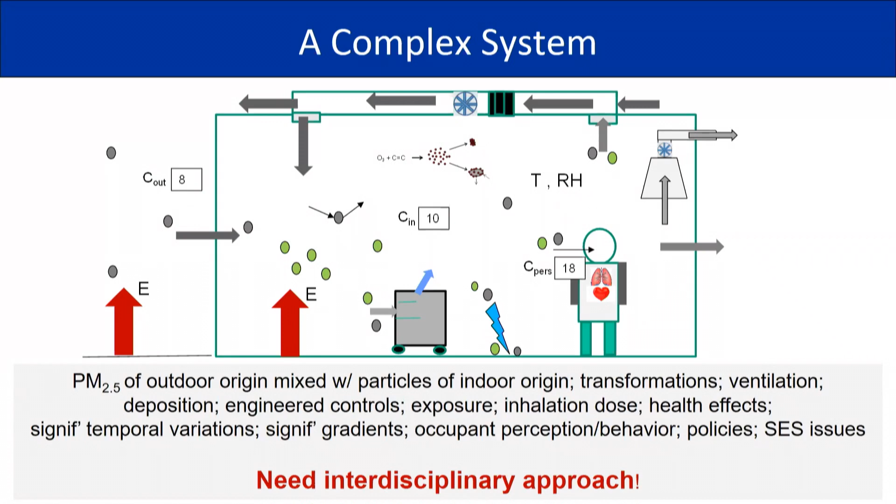This underscores the fact that we need an interdisciplinary approach to deal with these problems. And even though the system is complex, one of the nice things about this workshop is that there were some really practical nuggets that came out, and I'll try to highlight some of those.

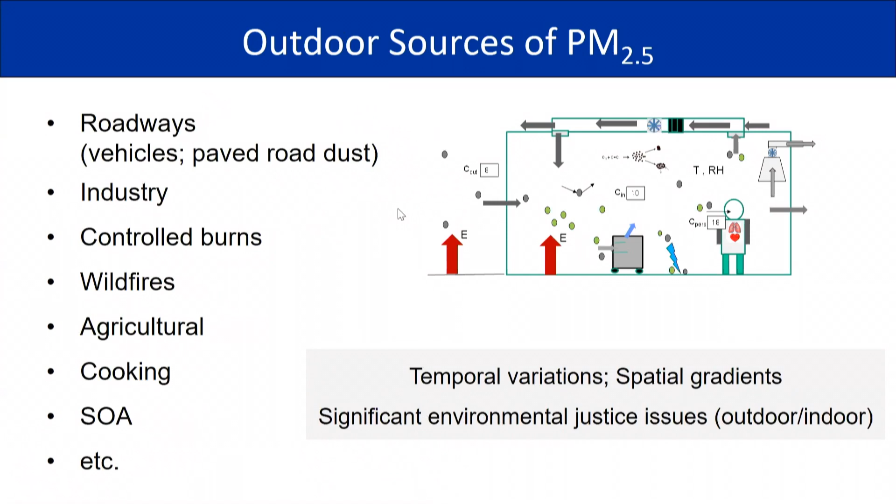We'll start with outdoor sources of PM 2.5. There are many. I don't need to go through all of these. But again, there's significant temporal variations and spatial gradients with respect to outdoor sources of PM 2.5 that affect indoor PM 2.5. And there are significant environmental justice issues associated with the locations of underserved communities with respect to many of these sources.

There's the outdoor to indoor transport of PM 2.5 across the building envelope. Brent Stephens spoke about the fact that the infiltration factor for PM 2.5 that's outdoors coming indoors has a central tendency about 0.5, although it varies a lot by specific homes and by city and by season, which means that concentrations of particles indoors that are of outdoor origin are about half of what they are outdoors. And there are a lot of major factors that affect that.

There was an interesting analysis done of microenvironmental PM 2.5 exposures that suggested that about 71% of our exposure to PM 2.5 occurs in our homes and about 20% inside other buildings. So by difference, you can see how much happens outdoors, less than 10%. And of our exposure inside these buildings, roughly half is to PM 2.5 of outdoor origin and half is to PM 2.5 of indoor origin. These are generalizations again, but good to keep in mind that our exposure indoors is to both outdoor and indoor PM 2.5.

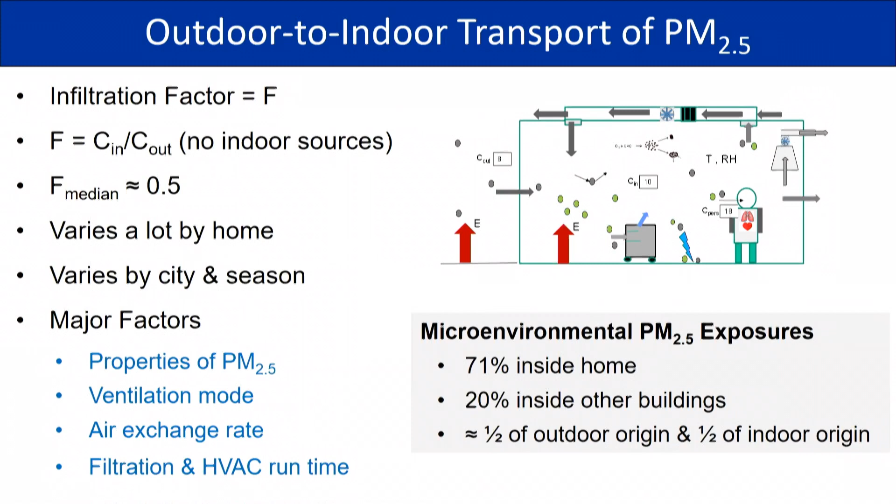There are indoor sources of PM 2.5, and I list a lot here by category: combustion, which involves cooking and candles and fuels; phase change, we heat up oils, they get driven into the air where they're cooler and they condense; mechanical, like ultrasonic humidifiers and vacuum cleaning; biological, respiratory aerosols and mold spores and that kind of thing. Chemical reactions can occur indoors with a wide range of products, including secondary organic aerosols.

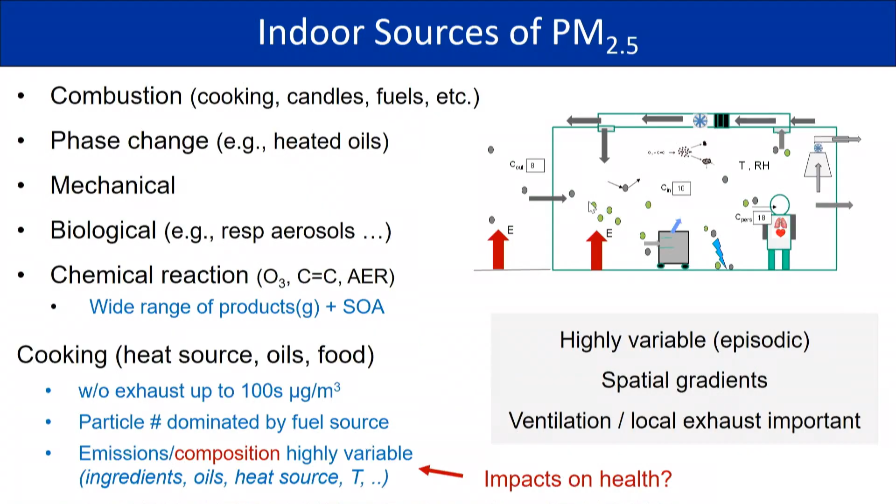And then we heard from Marina Vance in the first session about cooking and emissions from the heat source, from oils that are used for cooking, from the food itself. Without exhaust, we could be talking about hundreds of micrograms per cubic meter during cooking. Particle number is dominated by the fuel source, and emissions and composition are highly variable during cooking events, and there's very little information about what that means with respect to health.

All right, so transformations occur in indoor atmospheres. When outdoor PM2.5 comes indoors, they see a large surface to volume ratio that they didn't see outdoors, if you can put human qualities to particulate matter. They see less oxidants, a lot of VOCs and semi-volatile organic compounds indoors, much higher concentrations than outdoors.

Evaporation occurs, which can shrink particles. Thermal partitioning occurs, which changes the composition of particles. There's uptake of SVOCs like plasticizers indoors. And these transformations can be quite significant. They can affect size, pH, chemical composition, et cetera. And those transformations occur for particles of outdoor origin and indoor origin.

So one question is do these transformations of particles change the particle health effects? We actually don't have good data on that at the moment.

Effects of relative humidity on PM2.5. We know that relative humidity affects water content of PM2.5, which can change the size of particles, especially for particles like respiratory particles. It can also affect chemistry that happens in those particles and microbiology that happens in those particles.

We know that bacteria survival is lowest at low RH, and virus survival is lowest at mid RH. So differences in whether we're talking about bacteria or viruses. And so one question is, what are the optimum environmental conditions we should have indoors to reduce the health impacts of PM2.5?

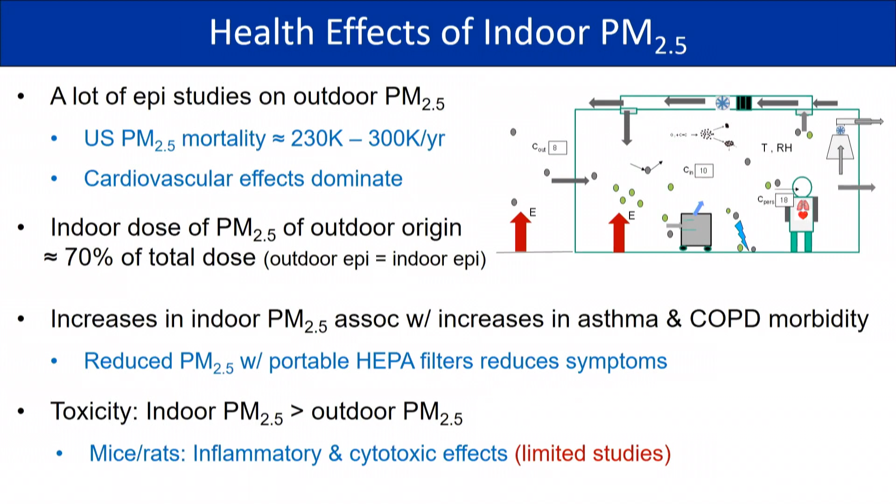Andrea Ferro in the first session mentioned that there are some limited studies with mice and rats that show that indoor PM2.5 has greater toxicity than outdoor PM2.5 with respect to inflammatory and cytotoxic effects, but also acknowledged that there's a very limited number of these studies and more research is needed.

There's a complexity of assessment of metrics for indoor PM2.5. It's better to measure indoor particles than outdoor particles and try to predict what happens with outdoor particles. Personal measurements are best if we can make them, but they're cumbersome. There are 4 dimensions to complexity associated with indoor PM2.5.

We have a broad size range, even within the PM2.5, from ultrafine all the way up to 2.5 microns. Chemically complex particles, high temporal variability in concentrations, and spatially variable. And I think Bill Nazaroff made the comment that no instrument measures everything.

So one question is, what measurements are the most important? And where should we make them? And when should we make them? Right? There's still optimization to be done there.

There's complexity of measuring actual exposure to PM2.5. Do we focus on short time scales like hours or longer time scales like months? Depends on whether we're looking at acute or chronic health effects. Time between exposure and onset of health impacts is important.

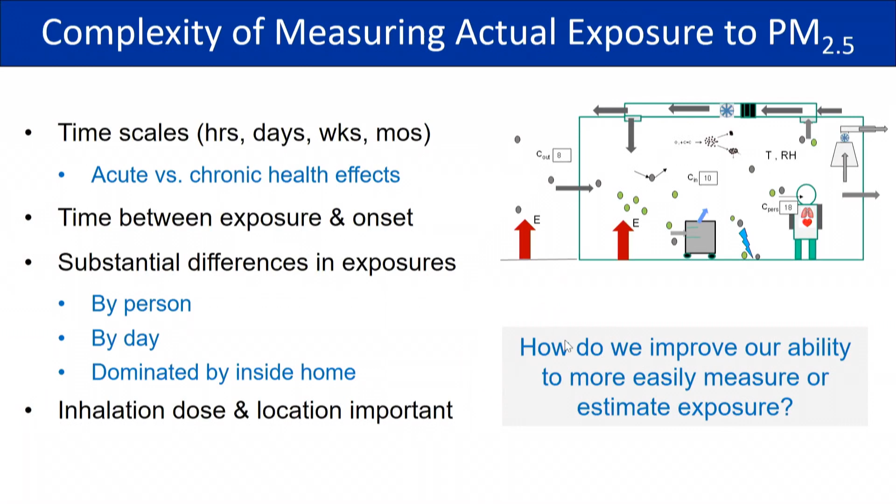And there are substantial differences that Kirsten Koehler showed in session 2 by person, and by day for the same person. But our exposures tend to be dominated inside our homes. Inhalation dose and location in the respiratory system are both important. How do we improve our ability to more easily measure or estimate exposure? Still work to be done there.

Low-cost consumer instruments for PM2.5. There's growing use of these instruments, these optical instruments, but protocols are lacking. There are a lot of different metrics that are used to compare them against reference instruments and look at limits of detection and that type of thing.

Under controlled laboratory conditions relative to reference instruments, these devices tend to be plus or minus a factor of 2, but worse than that in the field with a lot of confounding factors. There are problems with these devices when we get to concentrations less than 10 micrograms per cubic meter, which is actually a fairly common range for PM2.5 indoors.

They can be applicable to trends to see that things are going up rapidly or down rapidly to tell us something bad's happening or something better is happening if we put on a portable HEPA air cleaner, et cetera. And how do we best use these to improve indoor air quality during wildfire season and that type of thing? I combined here some of Lindsey Graham's comments with Dusan Licina's.

And I think moving forward with these low-cost sensors, we have to understand that individual perception of indoor air quality is important. And can sensors help with those perceptions? Lindsay presented information that suggested that anything that gives healthy action visuals is preferred by people. They don't want to just have a number that says 12 or 20, right?

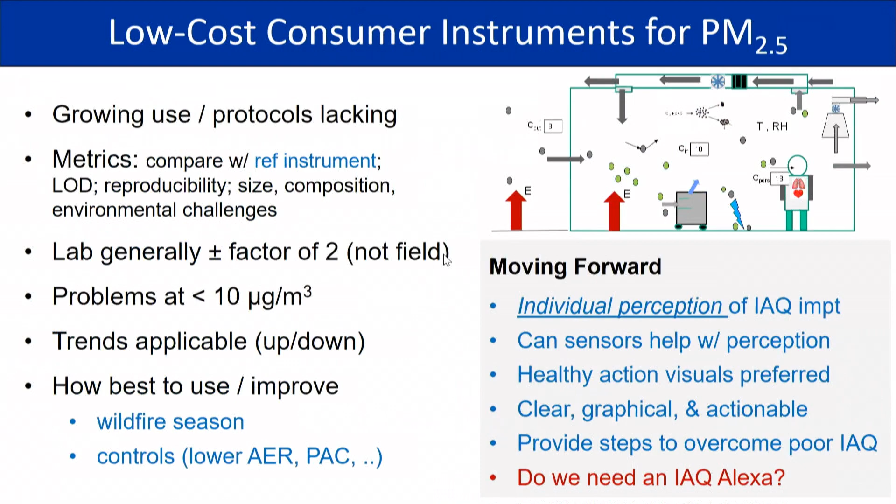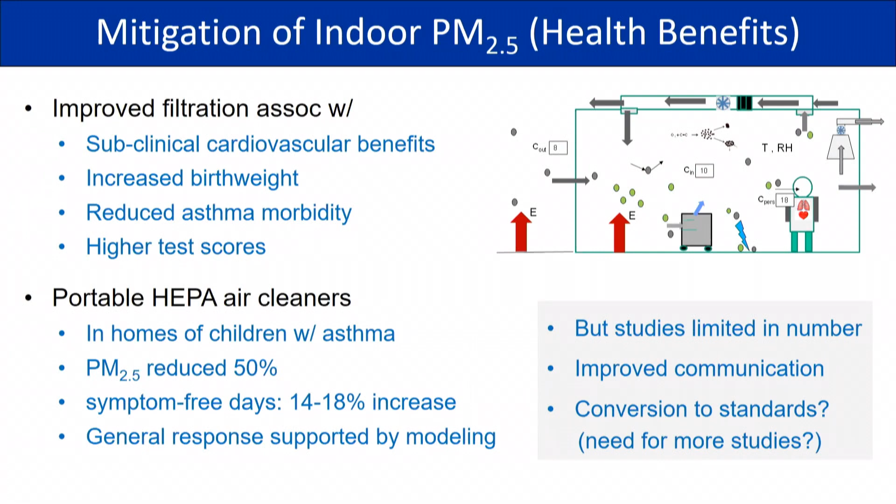And that general response is supported by some of the modeling that Stuart Batterman showed today. But these studies are really limited in number, and we have to do better at communicating the benefits of improved filtration. And then, as was mentioned today by Sarah, can we get to the point of actually developing standards to help people?

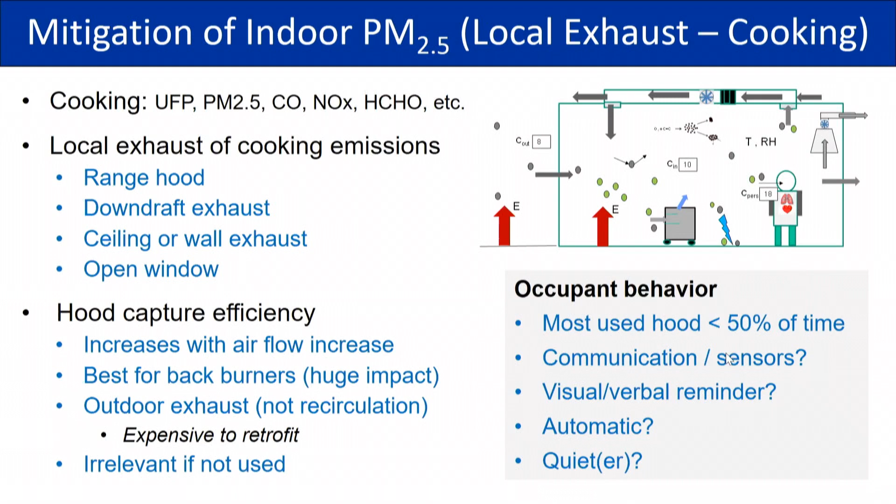And again, just like with any technology, all of this is irrelevant if somebody doesn't use their exhaust vent when they're cooking. So occupant behavior is important. Most use their hood less than 50% of the time while cooking in the study that Brett mentioned. Can we use sensors to help with telling people, whether they be visual sensors on the hood or verbal reminders from Alexa, or can we basically make it automatic that fume hoods come on when anybody is cooking? And then can we make those hoods quieter, which seems to be an issue with people.

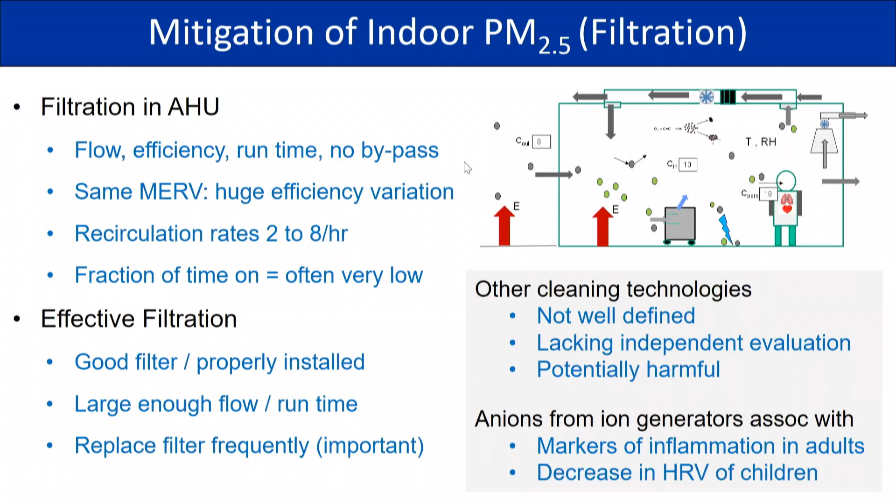And then the issue of other cleaning technologies came up, which are not well defined, lacking independent evaluation, and potentially harmful for some of these unproven technologies. They're getting a lot of look right now. Earlier on day 2, I think it was Stephanie Holm mentioned that anions from ion generators have been associated with markers of inflammation in adults and decrease in heart rate variability in children, which is not a good thing.

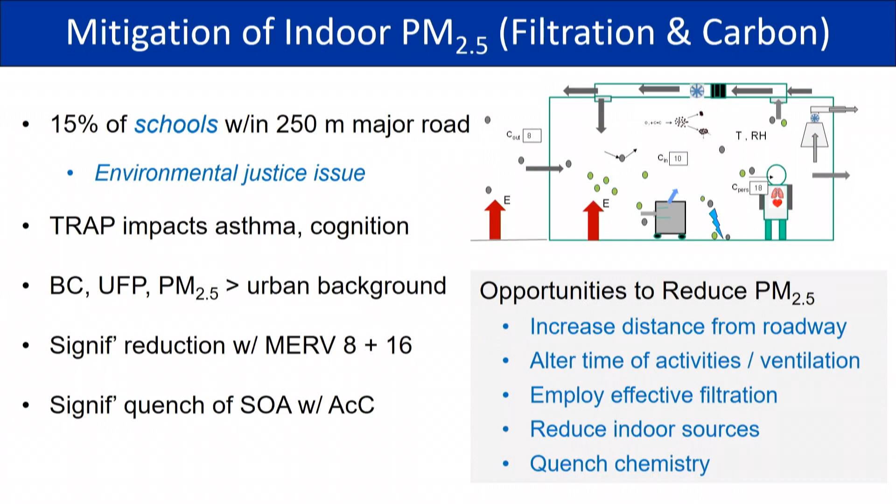So opportunities to reduce PM 2.5 for schools: increase distance from the roadway, alter the time of outdoor activities of children to not be at heavy traffic times, maybe alter ventilation to have less ventilation in the morning when you have substantial traffic nearby, employ effective filtration, reduce indoor sources, and quench chemistry.

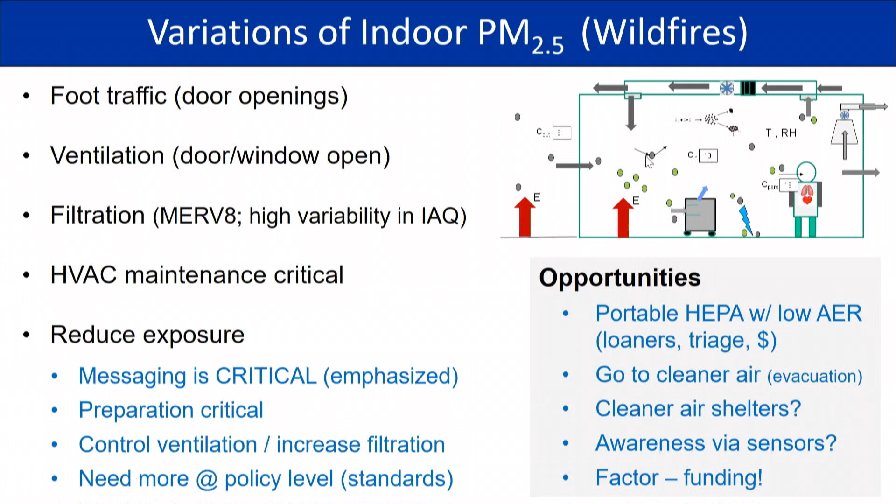Preparation is critical. Don't wait until the wildfire is in full bore. Prepare beforehand. Control ventilation, increase filtration. Again, the use of portable HEPA air cleaners can be very valuable during wildfires, and we do need to think about more policy level standards here. So a lot of opportunities here for trying to reduce population exposures to PM 2.5 during wildfires and other events. And as was mentioned by Sarah, funding is an important factor if states and communities are going to be able to help.

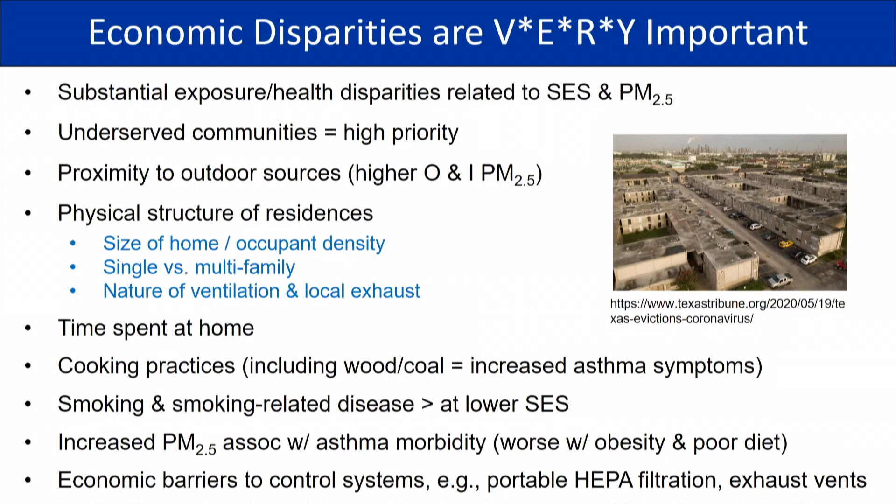Increased PM 2.5 is associated with asthma morbidity, and it's worse with obesity and poor diet, which tends to be higher in many communities that are of lower socioeconomic status. And of course, there's significant economic barriers, as Stuart just mentioned in the last Q&A session, to being able to even have control systems in these communities. They're expensive. $250 is a lot to many families. So that is my summary.